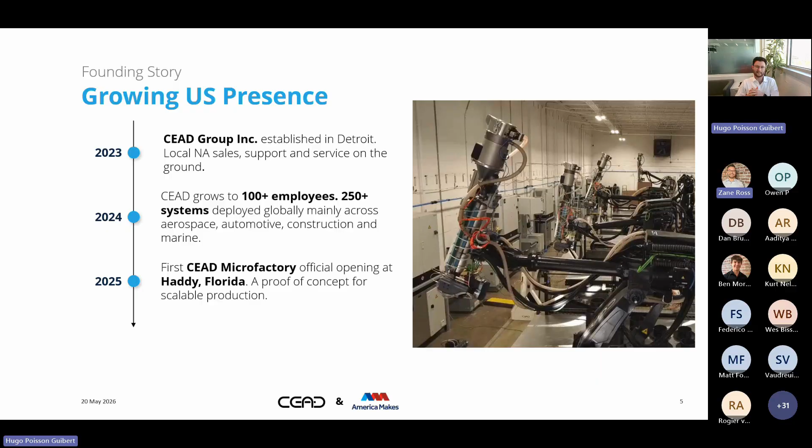We also installed in 2025 the microfactory at Haddy, which most of you probably know because it's quite famous on social media. And in 2025 we also launched the Faber Navalis, a system dedicated to printing boats, which I guess most of you have already seen the time lapse of on Instagram, LinkedIn, TikTok, you name it.

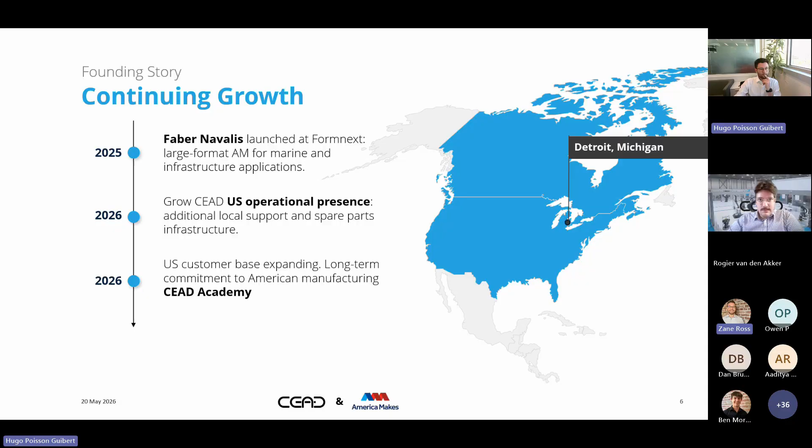So that's a bit about who we are, where we come from, and to give you an idea of where we're going, specifically for the US - there's a lot of attraction around maritime tooling and these kinds of things. So we are expanding our US operations with more local support, more spare parts, more infrastructure to be able to support our customers domestically. And I will give the mic to my colleague, Rogier.

Yeah, hello everyone, nice that you're here. I'm here to discuss a bit what LFAM actually is, because there are many kinds of additive manufacturing. This is a group for additive manufacturing.

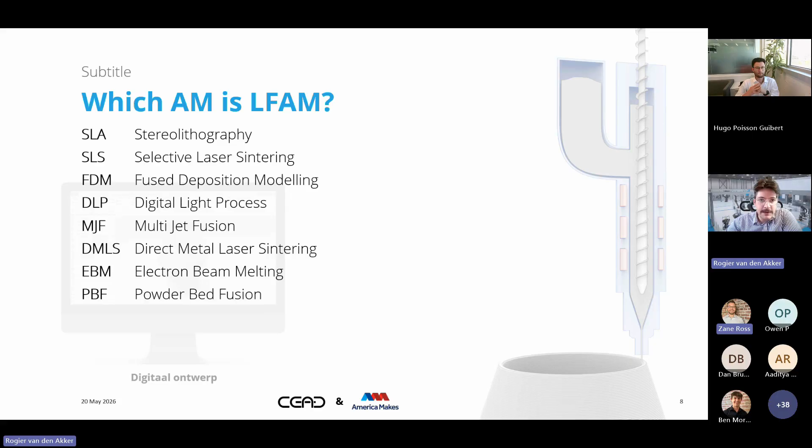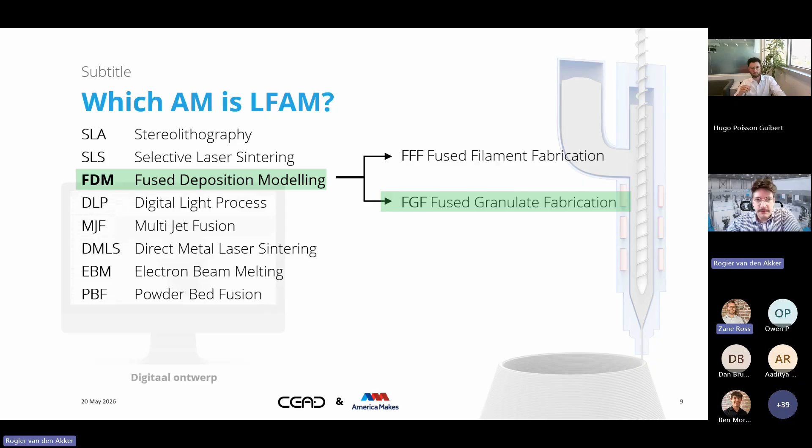CEAD, we are in the category of fused deposition modeling, and to be precise, fused granulate fabrication, or FGF. A lot of people may know FFF, the small printer on filament. Basically FGF works the same in principle as filament fabrication, in the sense that plastic gets fed into the nozzle, heated up, molten, and then you build up the shape with that molten plastic. Often these filaments are not filled, but they can also be filled. FGF works with granulate, which is the pelletized form of the plastic, often the state of the plastic before it becomes a filament.

It is just like an injection molding system working with a large screw inside a barrel that feeds the material forward to the nozzle, heats up the pellets gradually, and deposits layer by layer to build up the shape you need.

As you scale things up, things become enlarged too, like the temperature of the layers. You need to work with the precise temperature of the layer, or you will have a melting or a collapsing shape. Or if it's not hot enough, then you will have delamination between the layers.

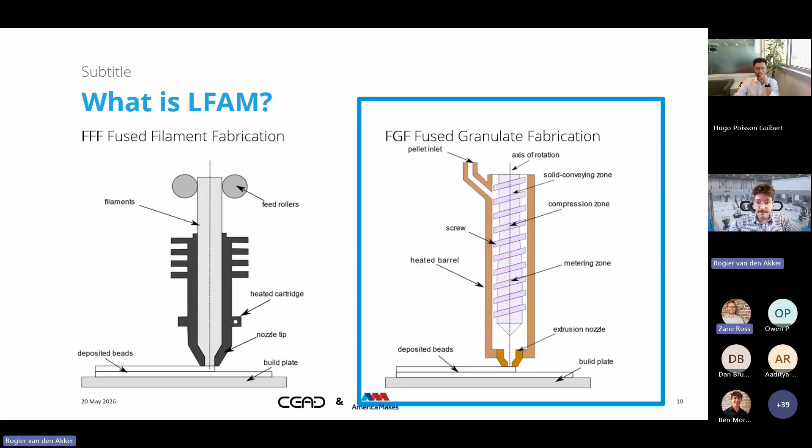So now it's time to ask you some questions. We'll go through a quick quiz about large format AM, and the idea is to show the difference between what people are used to in desktop printing and in large format.

The first question is, we just want to print a box, something very easy, like 3 feet by 1 foot by 1 foot. That takes about 60 seconds per layer, and there's around 100 layers. The question is, which extruder to use to print the box in a minimum of time. We have a lot of different extruders from 25 pounds an hour to 185 pounds an hour, and the question is which one to use to ensure that we can print that box the most efficiently.

Zane, if you could send the first poll. Oh yes, so you have different answers. Answer A is an extruder that can do 25 pounds an hour, or can be 55, can be 130, can be 185.

Just wait a few seconds for people to reply to the poll. I unfortunately cannot see the percentages of reply, but I see someone that replied D, which is obviously the trap.

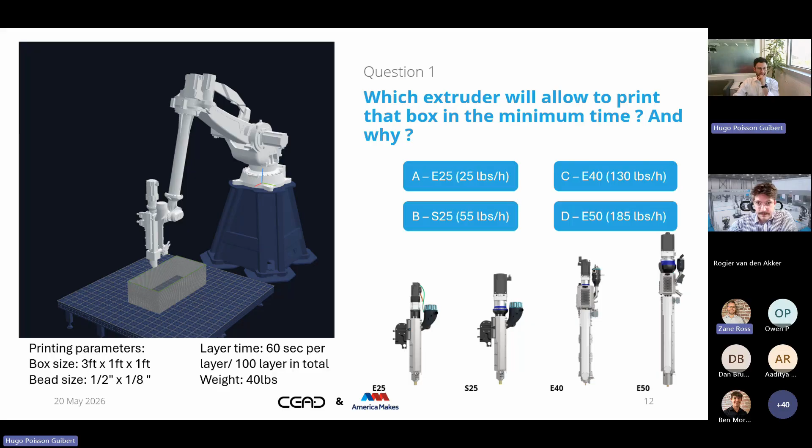So let me explain why it's not the big extruder. That means you can print faster, you have for sure more throughput, but there are a lot of things about the material itself in large formats. When we look at desktop printers with filaments, the more material we can extrude, the better it is, because the material cools down so quickly that we don't have to take care about the thermal properties. But in large formats, if you're too hot and you bring too much material, that will just collapse, because the material will be liquid and you won't be able to build the layers on top of each other.

So there's something called the layer time that is based on the material property, on the layer width and bead size typically, and the environment, if it's cold, if it's hot, and so on. That fixes a certain time per layer. You can do whatever you want, you will not be able to be faster than that.

So in that case, if it's 60 seconds per layer, that means that we can roughly print it in 1.5 hours, and it weighs 40 pounds. That means that we have on average 25 pounds an hour of output. So having a huge extruder will just use it at its minimum capacity, and it's kind of useless.

So in that case, around 25 pounds an hour, the answer could be answer A with the E25, which could be the maximum output of the extruder, or could be answer B with the S25 at 55 pounds an hour, which would be at 50% of its capacity. So something very important with large format is that a big extruder doesn't mean more production, and a slow and small extruder will sometimes be limiting if you need more output.

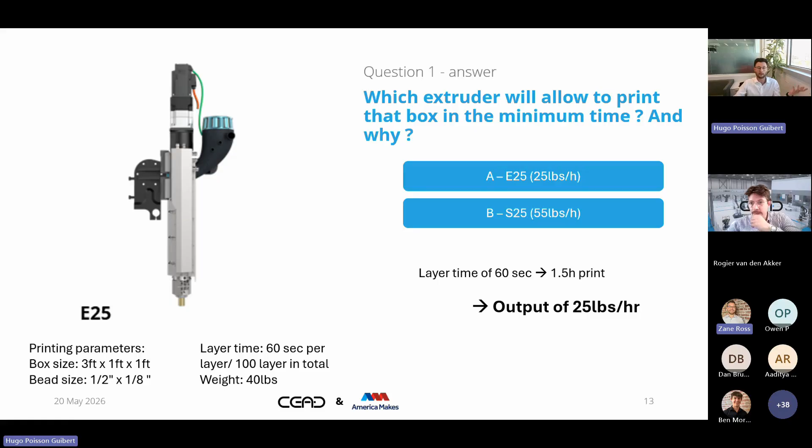So that box was quite small, but if we print a very large one, then we'll need a bigger extruder.

So let's go for the second poll. Zane, could you put it up? Yeah. So answer A, yes, we can print it and it makes sense. Answer B, well, see here, it doesn't make sense.

So just give a bit of time. It looks like we've got a pretty even split on this one, 50-50. 50-50? Oh, let's see who's right.

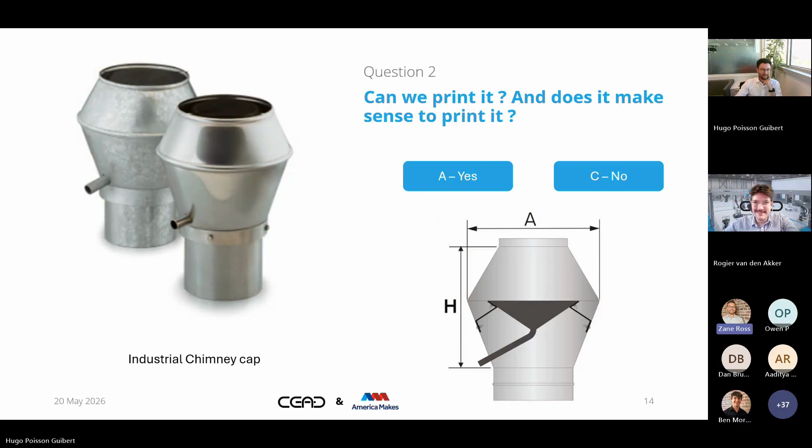So the answer is yes, and there's a reason for that. If we take the standard cap, in terms of weight, it's around 16 pounds. If we print it, depending on the materials, using low density and different materials, we can go down to 10 pounds. So we can save on material cost thanks to that, depending on the cost per pound.

But the most interesting part is about the production time. If you want to produce a chimney cap with regular methods, you will need around 12 parts and a lot of manual labor to assemble everything, and a lot of different skills, because it's not the same skill to laser cut, water cut the sheets, to bend it, to weld it. So a lot of different people are needed, and it will take roughly 1.5 days to do it. If you print it, it takes 5 hours, and you can just print it in one piece. So you save a lot in terms of time, weight, and cost.

And if you want to even increase production, instead of printing one at a time, you can print multiple of them at a time. As I mentioned earlier, the layer time is fixed, so in the same amount of time, instead of printing one part, we can print 2 or 3. So there are a lot of end parts like this one that sound basic, but because of all the labor required to manufacture them, it makes sense to print them.

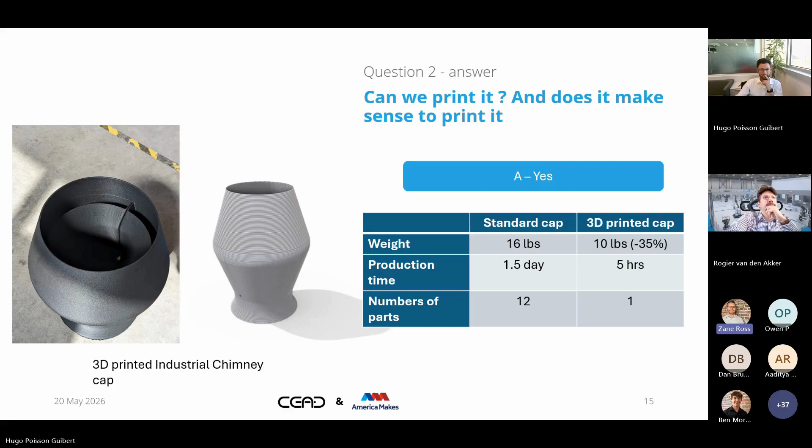Next question. If we go back to the first box from question 1, now I want to produce 100 of these boxes, because one box is kind of useless. I need 100 of these boxes, and I need to do them in 1 week. The question is, will I use the same system as the first question with a small extruder, or do I use a bigger machine? If you can send the poll, please.

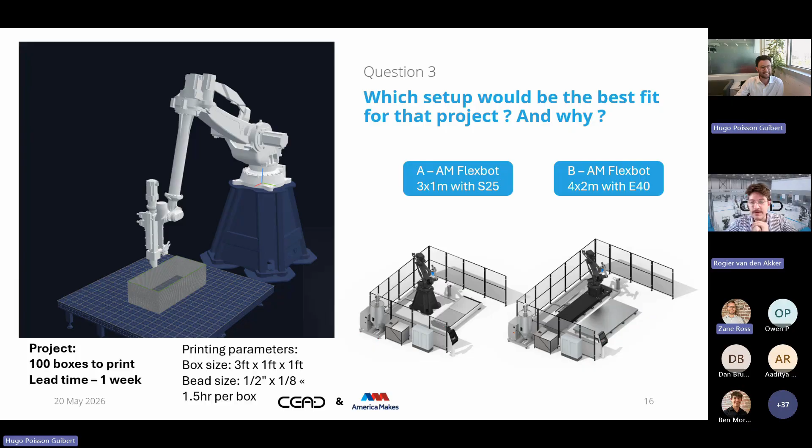Right, we've got results trailing in, and it is leaning heavily on answer B. We're about 2/3 to 1/3. Nice, 2/3 - that's the exact answer.

So basically, a small system will allow you to print the box, but you will print it in roughly an hour and a half, and you'll have to print them one by one. If you have a bigger machine and you want to scale and print more parts at the same time, then we can go with a bigger extruder.

We've seen that with one box, we have an output of roughly 25 pounds an hour. So that means that if we have an E40 extruder that can go up to 130 pounds an hour, we can print up to 5 boxes at the same time. With travel moves and all this stuff, it will take just a bit more time than printing one. But basically, if we print 5 boxes every 2 hours, we can do roughly 4 batches a day, which allows us to do 100 parts in 1 week.

So large format AM can be used for prototype one-off parts, but it can also be used for serial products. Of course, there's a limitation - if you want to do thousands of parts, tens of thousands, then another process will be better. But for small batches and small projects that don't require any tooling or preparation, it's way better.

If you want to do 100 parts and get them injection molded, you have to pay for the tool for the injection, and you'll wait a couple of months. It will cost a lot before you can even start producing. So that's one of the advantages of large format AM - you can produce small series quickly, and if you need, you can also change the design.

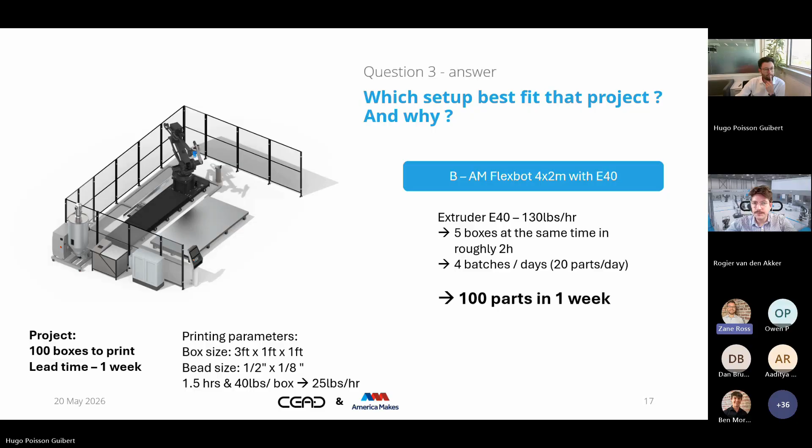Now, last but not least, everybody loves to print a Benchy once we receive our desktop machine. And the question is, can we print it with large format?

All right, we've got quite a few responses coming in. It is teetering, they're still coming in. We're just a bit skewed past 60-40 with A coming out in front.

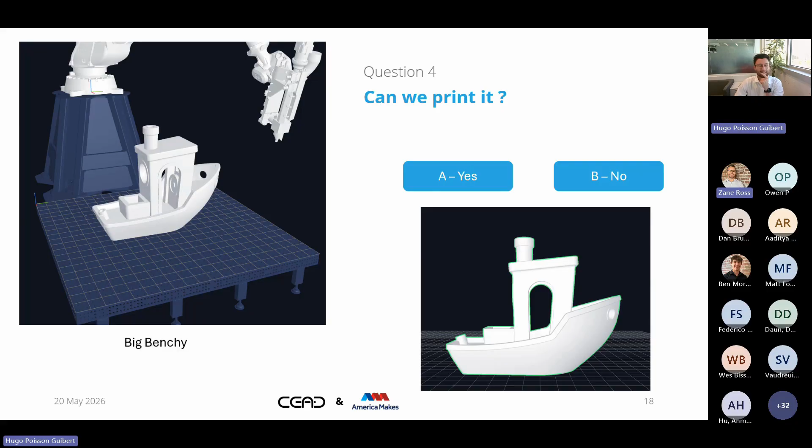Yes, we can print it. That's a bit of a tricky question - it's like, at the same time, yes and no. So I will just start a video for you to see how to slice it. If we want to print that with a desktop printer, we will just print it bottom up, put some infills, and if we need support at some places, we'll do it. But as we mentioned earlier, to print in large format AM, we only print the contour, so there's no infill.

If you're above 45 degrees in terms of overhangs, that means you cannot print it. So you can see in some areas we have some challenges with overhangs, and we'll be able to see that on this simulation. We'll print at 45 degrees, and you can see some places start in the middle of nowhere.

These places will need some support or some redesign. The pockets you have here in the middle need some support because they start in the middle of nowhere. With a desktop printer, we'd just print infill and start printing on top of it. In this case, we'll need to redesign the Benchy to print it. So a big Benchy is printable, but we'll have to review the design and change some parts of it.

So yeah, that's pretty much it for the quiz. I hope that's allowed you to better understand what is achievable, what is not, and what are the differentiations between desktop printing and large formats. And now we'll just dive a bit into the large format type of solutions.

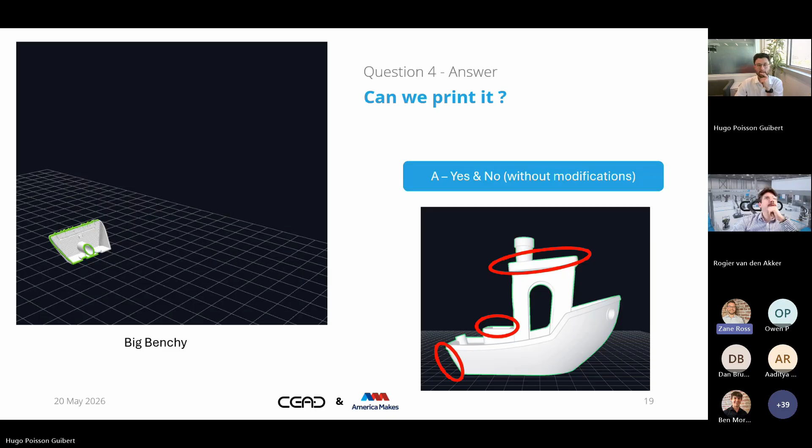Our presentation, of course, is about microfactories. That microfactory is a solution that has been shaped by the industries we work with. For the US, there's a large reshoring move. 36% of US manufacturers, instead of doing offshore production, want to produce in the US again. That doesn't change the competitiveness that already exists. People are used to quick iteration, low prices, just ordering overseas and getting tools for a low price. In parallel, they can do their processes in-house.

There's a move from serial production to customized local solutions. But in many industries, the workforce is the bottleneck. There's a shortage of skilled labor in traditional processes, like skilled woodworkers or mold makers, since everything has been done overseas all the time.

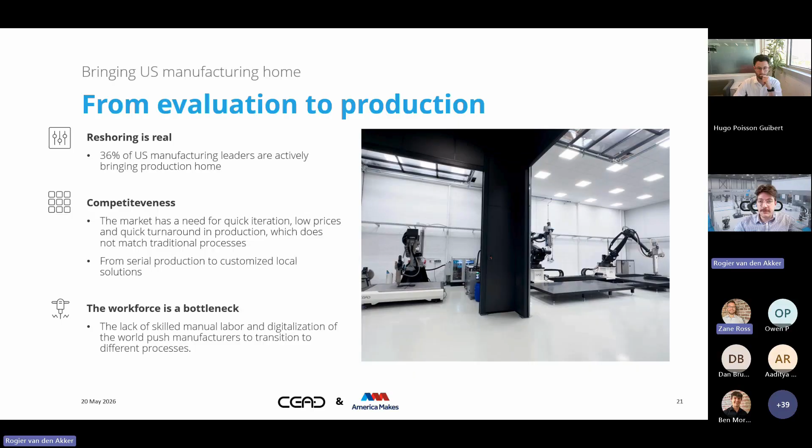Because traditional manufacturing is still mostly used, let me mention some points. Multiple production steps, like you saw with the chimney - assembly, bending, multiple toolings needed for different components, multiple kinds of machines, a milling machine first, then something that presses, for example. There's manual labor needed for the process. And often with traditional manufacturing, you're thinking of maybe an extra building for your inventory, because you need to have parts or tools in stock.

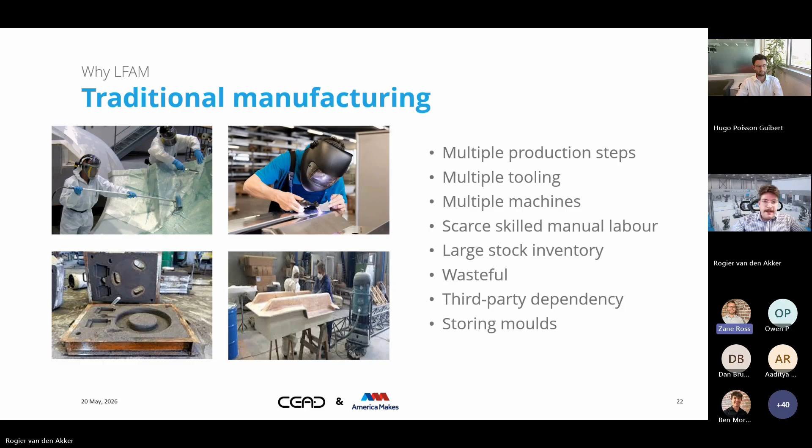You have a lot of waste. You're, for example, making a pattern and then you mill a block of polystyrene - how much material goes away? With large format additive manufacturing, that's a bit different. So those points I mentioned, let's name these four: long lead times, high costs, sustainability, and lack of skilled labor, which we see as the biggest problem.

By designing, for example, the Benchy you saw before in CAD so that it can be 3D printed - that's called design for additive manufacturing. I think you all know this, since you're working with different kinds of additive manufacturing. You can add complexity to the design as long as it's designed right.

Like the chimney you saw before, you can in one print integrate, for example, the edge inside to drain the water - it's the same layer. So if you design it right, your production with LFAM, with the slicing, you have a net shape which it will print, so you use less material. With 3D printing you need fewer components, so you can get it more locally sourced. 3D printing also offers recycled materials, and there's less skilled manual labor needed.

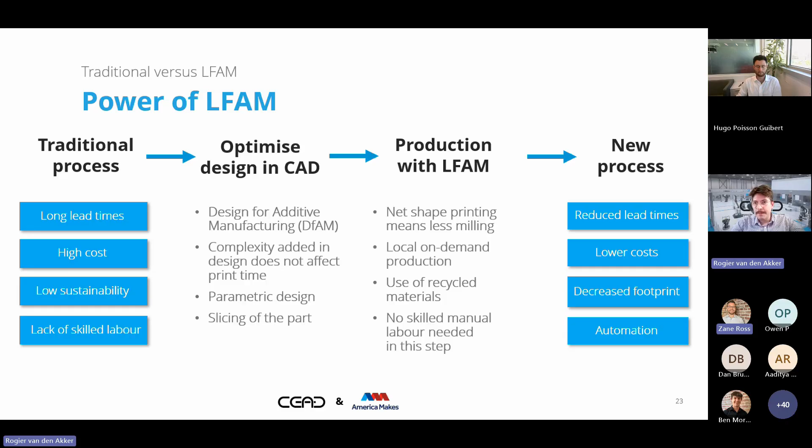So in the end, that process results in reduced lead times, for example in tool making, lower cost involved because of the lead time and material cost, and because with that shorter lead time you can produce more, as well as a decreased footprint, because basically all those steps needed require machines. Now it's in a single machine, and that is a key part of automation.

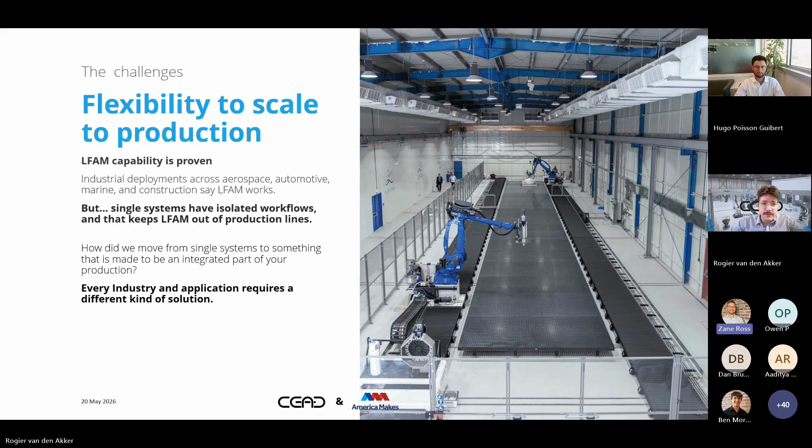So the challenge with additive manufacturing, with existing systems, is making that move from a single system to really being part of the production floor. Large format additive manufacturing is proven, and we have a lot of customers - right now over 270, in aerospace, automotive, marine, construction, but also other segments, as we'll be showing later. But if you look at a single system, often they produce a part on the work floor and then stand still, waiting for the next part. If you want to move from a single system to something that's part of an integrated larger picture, you need a different kind of additive manufacturing system. But every industry requires a different kind of solution.

For that, we designed earlier one of our starting systems, the FlexBot, which works on a CNC control, Sinumerik, which is an industry standard but is also scalable. So it can be configured to different sizes. You can start with a basic system and upgrade that as you become more confident.

You can have a hybrid process, so not only 3D printing but also milling, as you can see here in the picture. In the back here is a milling spindle. If you use the right software and material for your application, and the right scalable hardware, you can be very successful with a system like this. That is thanks to all the knowledge we have through our partners and the collaborations we've had.

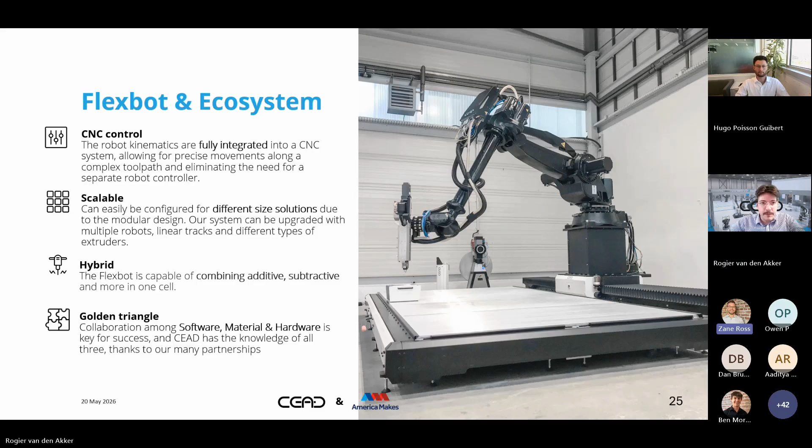That is the robotic system, but we also had, last year, released the FlexCube, which is a gantry system, also CNC controlled. So people already working with CNC control systems have the same kind of interface, so a very low barrier learning curve. This system is also very compact compared to a robotic system. It's around 8 feet high, and it's a 3+1 axis system, so it can print horizontal or at 45 degrees, as you saw with that benchy model being printed.

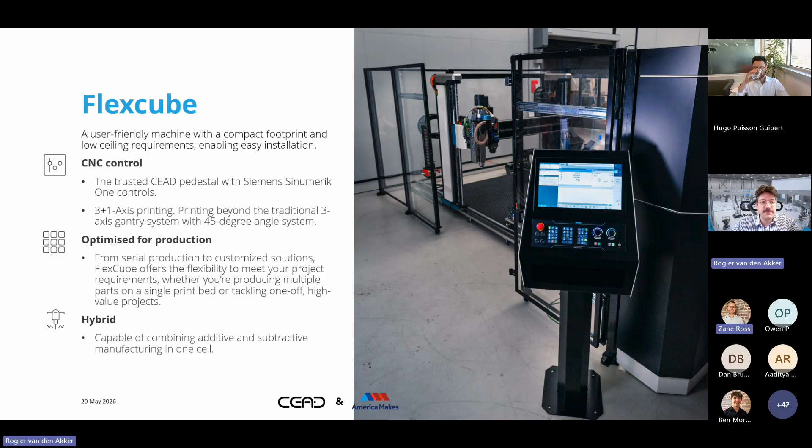This system is also hybrid, so it does printing and milling, which again makes the space you produce in very compact. Key in these kinds of systems is that scalability, both in the sense of the size of the printing area as well as the extruder.

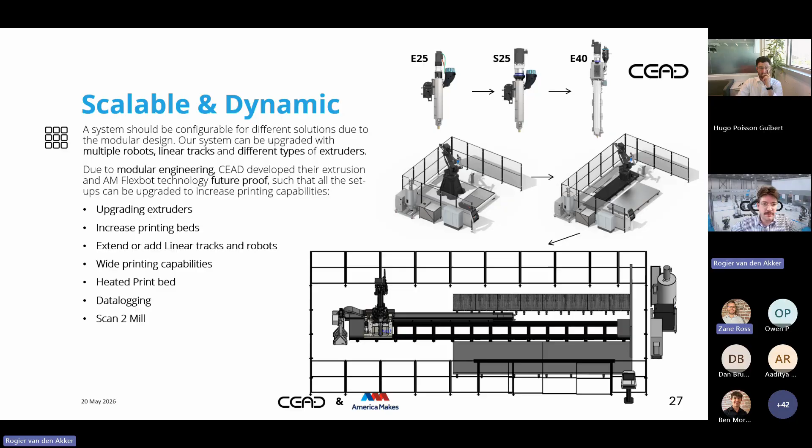Maybe first, as in the examples from Hugo, you want to print a single box to see how to print it. But after that you want to move towards printing 100 boxes, and then the right system will allow you to upgrade to a different extruder without having to completely reinvent the system. That applies to the extruders, the size of the print bed, the linear track, but also features like heated print beds, which make sure the layer doesn't cool down too quickly. You can also have data logging or scanning tools on that system, so you have a fully hybrid system customized for your application.

So there's a lot of different configurations based on need and application. You might ask yourself which industries we target, and the answer is a bit of everything. We have customers doing aerospace tooling with autoclave tools, trimming jigs, infusions, also customers doing architecture, printing furniture for Disney, printing bars and things like that, or boats that are printed. We also have a very particular system for printing windows. So there's a lot of different applications depending on the needs, and each application requires a different type of system.

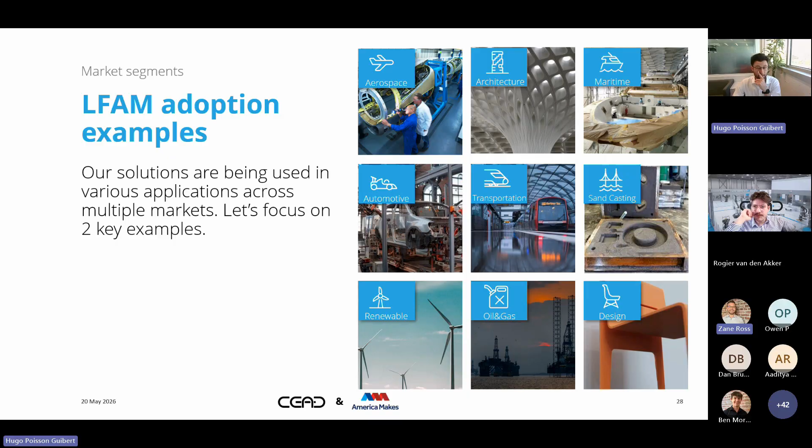I'd like to dive into two applications today that are very important in the US, and the first one is maritime. The current administration has committed about 2.1 billion to the USV market, and it's still growing every day with the idea to be...

Is it okay? Yeah, I see Rogier moving. Rogier, you want to go ahead and take over? I think Hugo got disconnected.

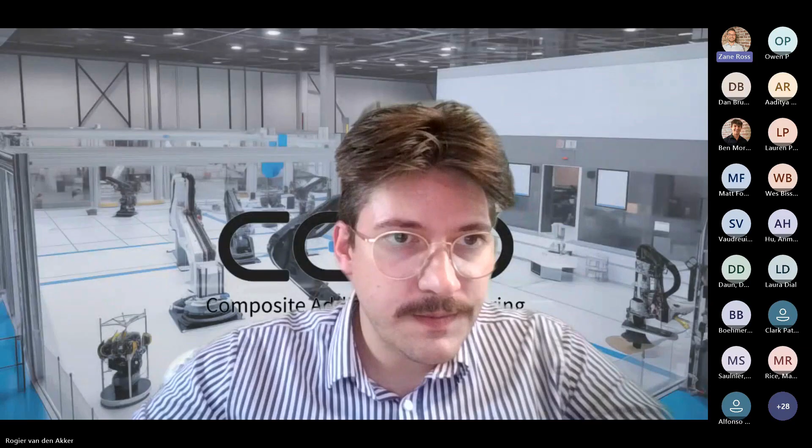Let me get back to the slides. Apologies, folks, we'll get started back up here in just a moment. Perfect, all right Rogier, thank you.

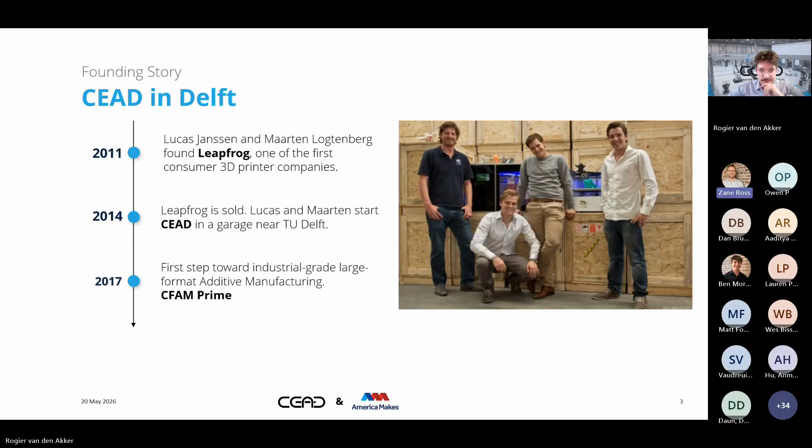Running on, sorry. I think I'm back, sorry, it sounds like my internet connection disappeared. Can you hear me well? Yeah, I can hear you loud and clear, and you can take over the presentation. I've loaded the right slide, so feel free to go ahead.

Thank you, and sorry everybody for that. So yeah, I was just saying there's the ambition to produce more, but right now the money is not the problem. The problem to manufacture locally and domestically will be the manufacturing speed and the people.

I think we lost Hugo again. Oh, there you are. Am I back? Yeah, I'm sorry, that's weird. Sounds like the office.

There's an ambition to manufacture a lot domestically, but we don't have the manufacturing speed and the people to do it. If you want to do it traditionally, you'll have to go through a tooling process, but because of the quick iteration of the USV market, it's impossible to use tooling. If we start tooling and wait six months for it to come in, we'll have already iterated to the next version in the meantime. So the only solution is to use something that can be...

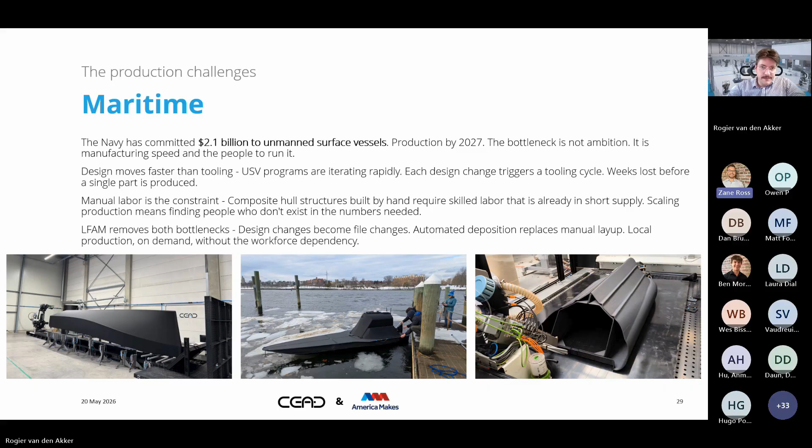Going into that example you saw on the right, during BOMA, the Bold Machina NATO exercise held in the Netherlands, we were asked to demonstrate a small 8 feet USV as well as a 40 feet rib design boat. Looking at that USV, the FlexCube system was used here. There was a very rapid deployment.

In 2 days, the system was set up and ready to produce. The system was in a forward base position on the floor that normally for larger systems would not be enough, but for this system it was. People could sit next to the system, iterate on designs, and the printing took 10 hours. Basically, you could redesign, print, and develop very quickly instead of waiting for the different steps in traditional production. The weight of that hull was 65 pounds, to give you an idea.

They were very impressed with the reduction in lead time, the setup also meaning you can deploy the system in a few days, wherever it's needed, close to where it's needed, and the lead time improvement linked with that is just huge.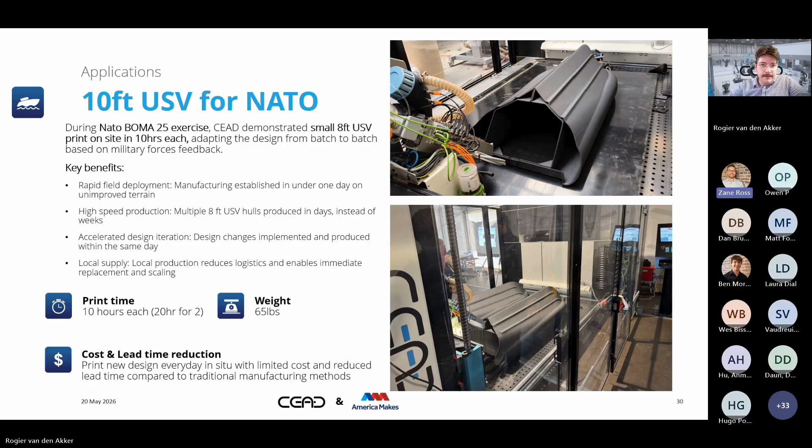Then the other main issue is the tooling industry. As I said before, companies are used to ordering a tool offshore in Asia or India, and getting that to the US. So they're dependent on the supply chain, and the traditional process takes long - you don't have that tool within a few days.

And the situation is that with current trends of how much production will come back to the US, 2.1 million jobs will not be filled because there's such a lack in labor force. Trying to educate these people will take multiple years to get them back to training, and then they also need the experience. So this is really a big problem.

3D printing removes that hurdle, because newer education is more digitally focused, 3D design, and that way you can have your skilled labor focusing on those few steps in the production line, and have enough people trained with digital means to run the production.

This mold that you see here is a 2 meter by 2 meter by 800 millimeter tool, quite large. It's used for this part which covers the hydrogen fuel tank of this racing car. It's a carbon fiber component, and it took only 36 hours to print and 40 hours to mill. So within a week, you can have a tool ready for use instead of waiting multiple weeks or even months.

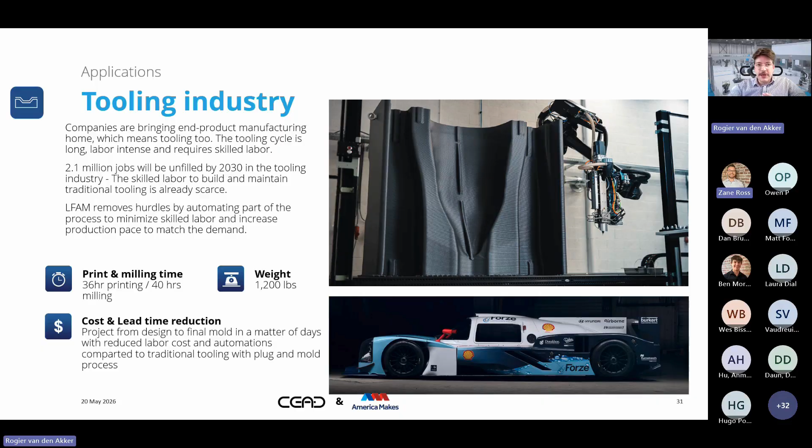These are just singular examples, but going back to that micro factory subject, in essence scaling those two examples, so USV production and tooling production, can be done on a larger scale. Basically, having what we call a micro factory, you can have multiple machines running next to each other. You can print on demand because you can have multiple machines working on a project.

Looking at those lead times you saw before, what you see here are 6 FlexBot systems with E40. You can print multiple parts at the same time, with multiple robots printing simultaneously. And you don't have to store all the components in a warehouse, because you have the digital files which take no space, only gigs on your computer. You have a storage of material which is very efficient, pelletized material, instead of those parts that many are used to needing to store.

Often it's like a whole separate building, as large as the facility, with molds that they have to keep for 5 years, 4 years as a backup.

And the right way to do that is often starting small. So as before, you print with that single box, you decide what kinds of applications are a good fit, which need redesign, what is the best workflow to produce them, and then scale that to a real production line or part of an existing production line, like tooling.

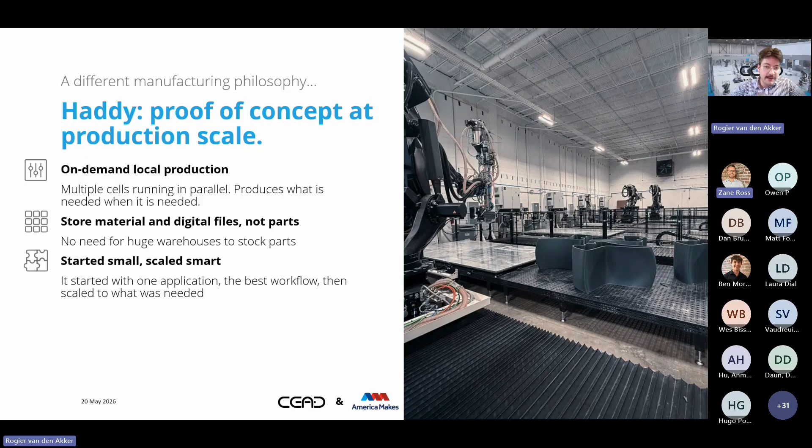So in essence, the message here is a robotic micro factory, or a micro factory—because there are also gantry systems that are a key part in this in coming projects—is not a room full of machines that just do their own thing and wait for the next step, but you can have them as a full production architecture. You can see it as a modular network of cells that can operate in parallel, and that you can scale as you change, for example, the volumes or the size of the components you're making.

And in essence, that system, if you have the right system, it's always reconfigurable and flexible. Like Haddy, they do a very large range, a larger range than they did before, and that helped them grow because the system is also designed to grow.

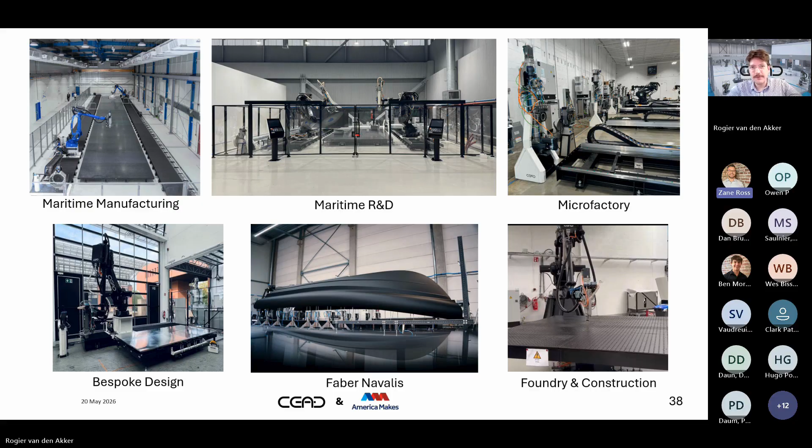Thank you, Zane. Thanks, everyone. Have a great day, everyone.